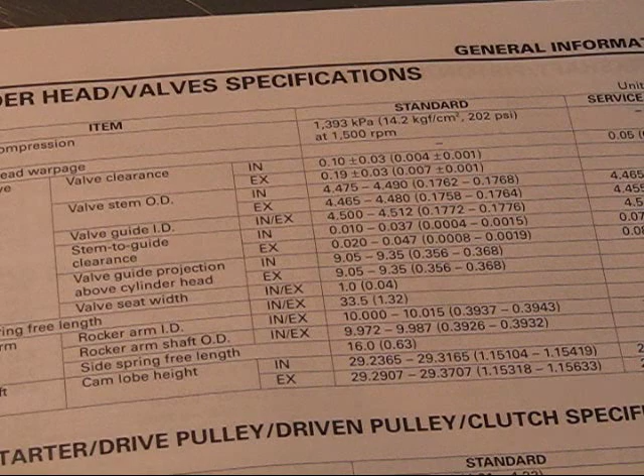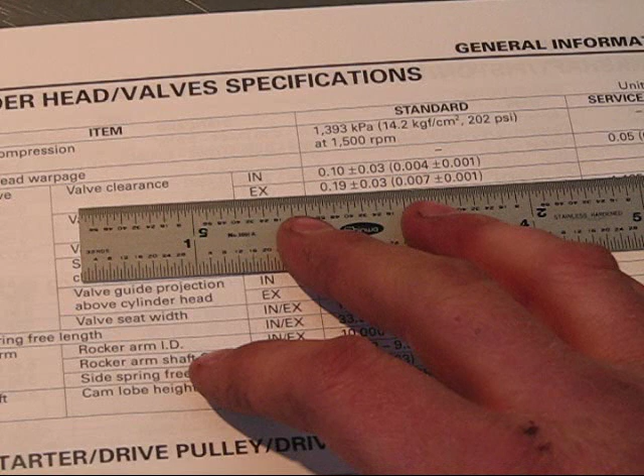The Honda service manual calls for 0.10 millimeters plus or minus 0.03 millimeters, or 4 thousandths plus or minus 1 thousandth of an inch, on the intake valve. And on the exhaust valve, we have 0.19 millimeters plus or minus 0.03 millimeters, or 7 thousandths plus or minus 1 thousandth. The reason the exhaust valve calls for greater clearance is because it's subject to more heat than the intake valve, and it expands and contracts a great deal more.

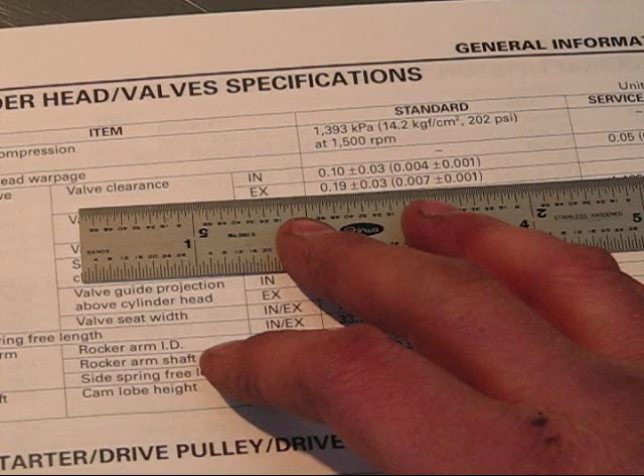Okay, over to the drawing board.

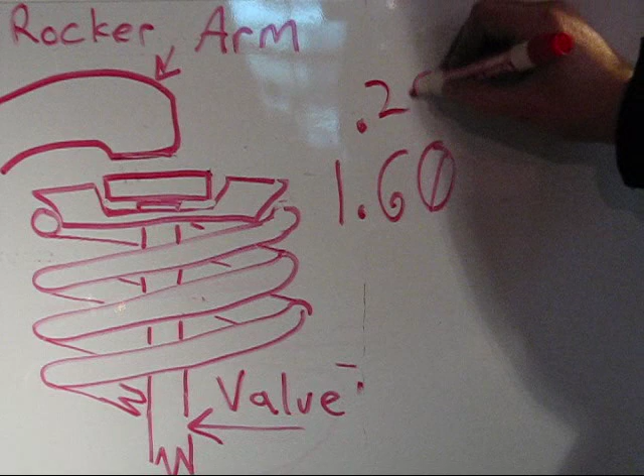The valve shim installed in the Metropolitan engine right now is 1.60 millimeters. The clearance we got between the shim and the rocker arm was 7 thousandths, which is 0.1776 millimeters. However, because our valve shim kit goes up in denominations of 0.05 millimeters, we rounded this up to 0.20 millimeters. Then we add those together, and that gives us the total space between the top of the valve and the bottom of the rocker arm, which is 1.80 millimeters. If we put a 1.80 millimeter shim in here, we would have 0 valve lash.

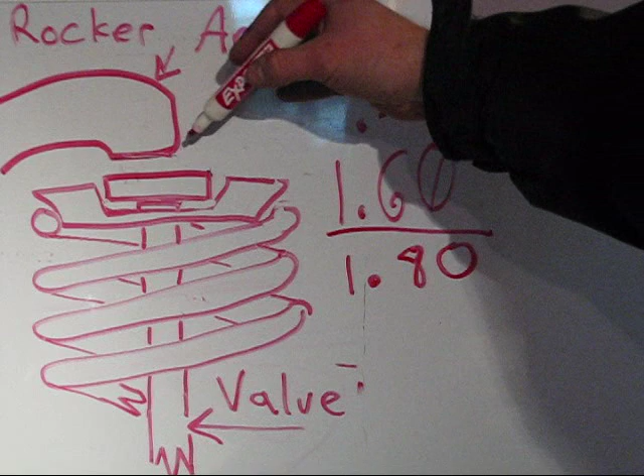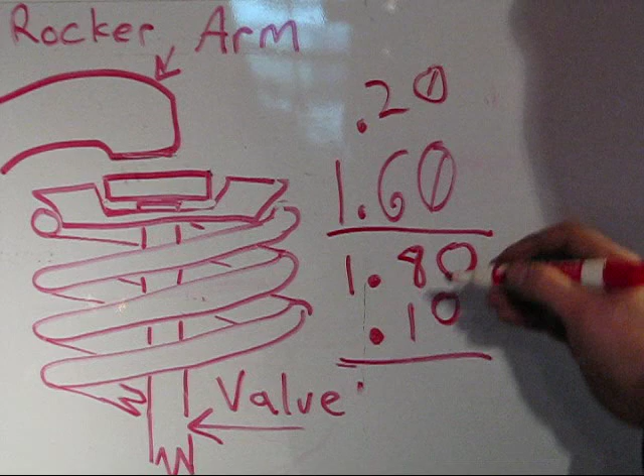So to actually get the proper valve lash that Honda specifies of 0.10 millimeters, we need to figure out how much to install. We subtract 0.10 millimeters from that, and that leaves us with 1.70 millimeters. So that's the size shim we're going to install, the 1.70 millimeter shim, and then we're going to double check with the feeler gauges to make sure this size is correct.

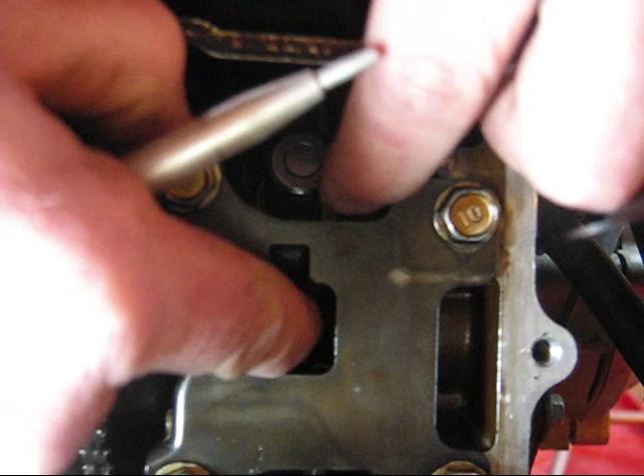Okay, now we're going to remove our old shim. Oh, my light just went out. That's not cool. Remove the old shim, and stick the new one to a magnet. There's the phone. And pop that in. And answer the phone, and then we'll come back and check.

We now return to Josh adjusting valves. Got a 4 thousandth feeler gauge, and we're going to see if my hand can get out of your way so you can see what's going on. It pops right in there. It's got a little bit of grab to it. That looks good to me. We'll go ahead and stick with that for our intake valve, and move on to the exhaust now, which is the same procedure.

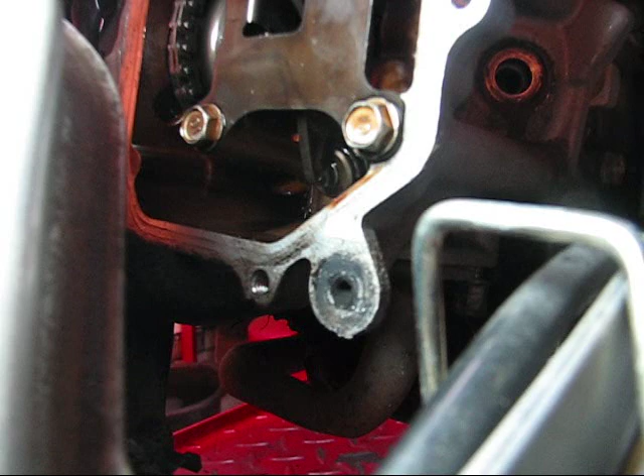Alright, let's check the clearance on our exhaust valve. I've got a 6 thousandths feeler gauge, which translates to 0.15 millimeters. I'm going to feel between the shim and the rocker arm. That actually feels fairly snug. I would go with that, to be honest. We could change it out and get the numbers spot on, but this will work.

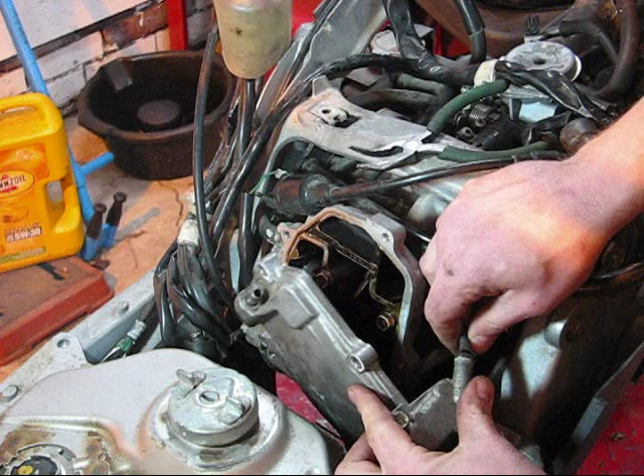Alright, let's put this thing back together and see if we can get it started. I like to connect the hoses first before I bolt the valve cover back on, especially because this particular hose can be a bit of a pain. Instead of removing them in the first place, you can leave them connected and kind of shove the head off to the side, but I chose not to do it that way.

I believe the manual says to torque these down to something like 6.5 foot-pounds. If you're a stickler about that kind of stuff, you can do it. I really am, I like to torque down cylinder head bolts and such, but for the valve cover, to me, snug is good enough. Been doing this for years, never had a problem. So you just kind of got to get a feel for it though. If you're unsure, torque it.

Spark plug going back in.

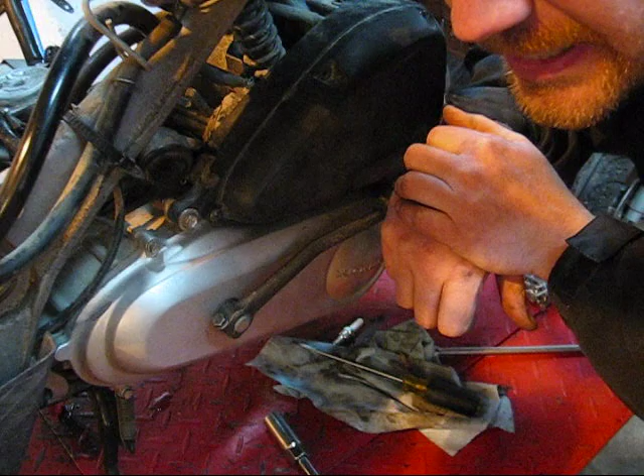A key. The battery is deader than dead, so we're going to use this thing. I think it's broke.

Sounds good. That, ladies and gentlemen, is a valve adjustment, on a Honda Ruckus or a Honda Metropolitan scooter. I appreciate you watching the video.